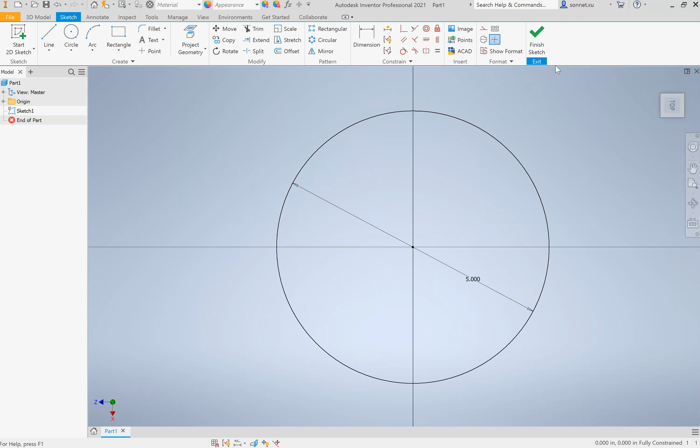So to go ahead and start, you click Start 2D Sketch, and for this case, I'll choose the XZ plane. You're going to start by making a circle. I'm going to make this 5 inches wide. So this is the rim of the hat, the very outer rim. You'll see what I mean once I extrude it. So I'm going to go ahead and extrude this. And usually the brim of hats are pretty thin, so I'm going to make this 0.125 inches.

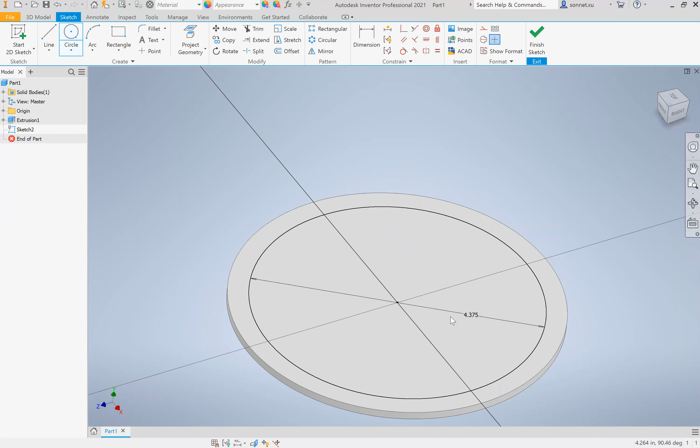Okay. After that, you want to make the actual top hat part, which is another cylinder. So just click Start 2D Sketch and start it there. Make another circle, but this time slightly smaller. I will make this 4.375 inches. Okay, go ahead and make that. Extrude this part out. I want a pretty tall hat, so I'm gonna make it maybe 2. Actually 2 is good. So then you just go ahead and click OK. And there you go. You have the shape of the top hat.

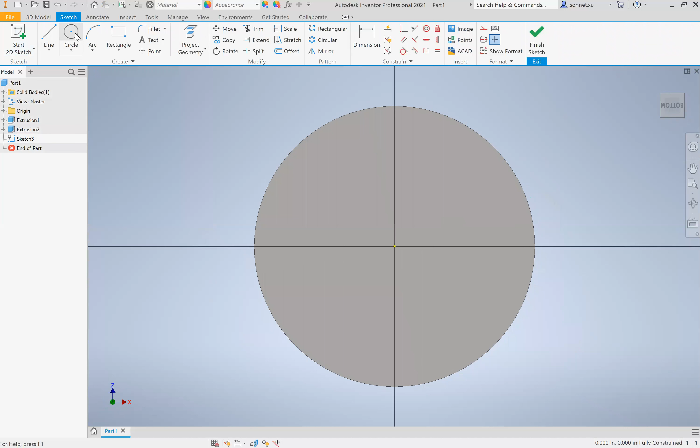But obviously there has to be a hole in the bottom, otherwise there's nowhere to actually put your head. So what you want to do for that is start a 2D sketch on this bottom base. Go ahead and click that, and then do another circle. I want the hole for the head to be pretty big, so I'll do 3.5 inches. So you're going to go ahead and click extrude. But you're going to notice that if you extrude it like this and click OK, it's going to make a solid like this. That's not what you want to do.

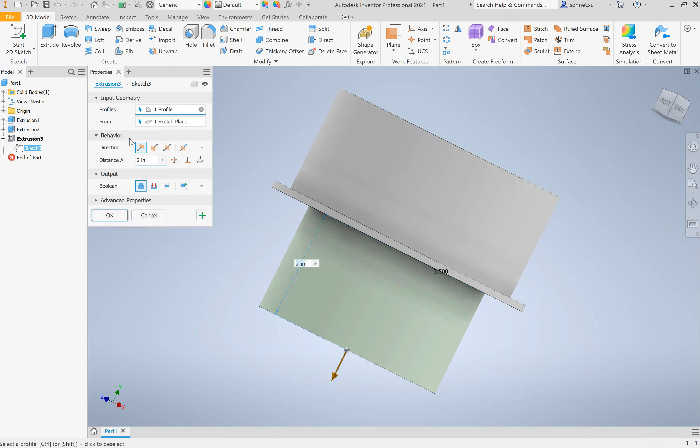So what you want to do instead is double click to edit the extrusion and change the direction. Then Autodesk Inventor will automatically know they want to cut into the top hat. If you click OK, you'll see that there's some problems. The reason that happened was because for this extrusion, when you change the direction, it's still solid, and you can't make another solid inside a solid. What you need to do is a cut. Change this from join to cut, and then when you click OK, it will work, because Autodesk Inventor recognizes that you're trying to take something out of an extrusion and not create two solids that both exist at the same point. There you go.

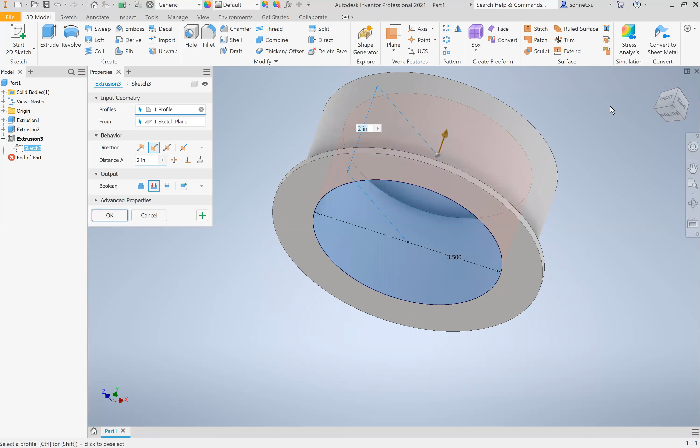The default length for your extrusion might not be 2 inches, it might be something more like 3 inches. If that happens, then that'll extrude way too much, and there'll be a big hole. So just make sure to adjust it to your needs. In my case, 2 inches. Okay, I click OK, and there you have it. It's a full top hat. But I want it to look a little bit prettier than that.

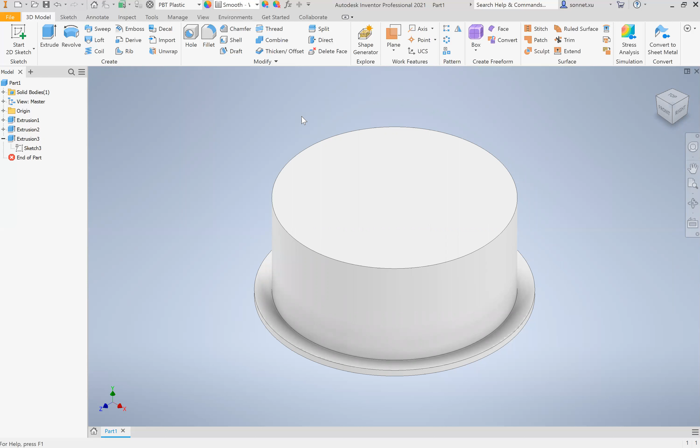So what I'm going to do is change the material. Obviously, the top hat isn't going to be made out of metal or anything. So let me look around and see what they have. I'll just say that it is plastic for now. I can choose PBT plastic, I guess. And you can see the color changed. And then I might want to also change the color. So I'm going to click smooth over here. I want to make it turquoise. There you go. I have a blue top hat.

Another thing you might have noticed about this top hat is that it's really, really sharp. I want a really nice and rounded top hat. So I'm going to use a fillet tool, and I'm just going to click all rounds, and you'll see that it automatically selects the areas that I want to fillet. The radius is 0.25. I could make it more if I wanted to, but I think that's good. I'm going to go ahead and click OK.

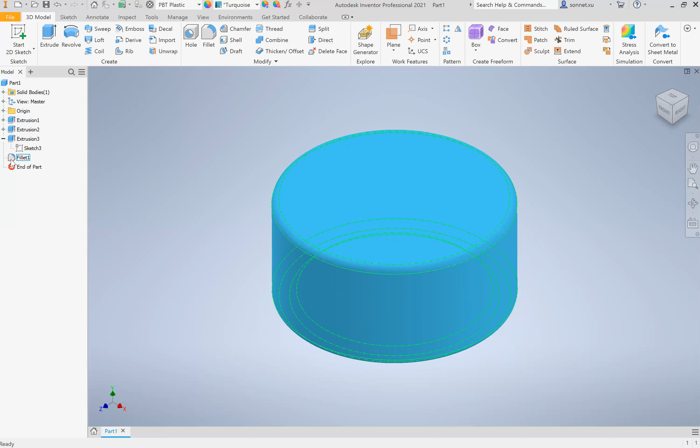And uh-oh, that's a bit too much. Let me redo this. The radius is actually a bit too much for me. I'm gonna do 0.05 because if you notice, it took my bottom rim away because the radius was so large. Maybe I'll do 0.025. Go ahead and click OK, and there you go. My turquoise top hat is done, and it's rounded, and it looks really nice. So that's how you make a top hat in Autodesk Inventor.